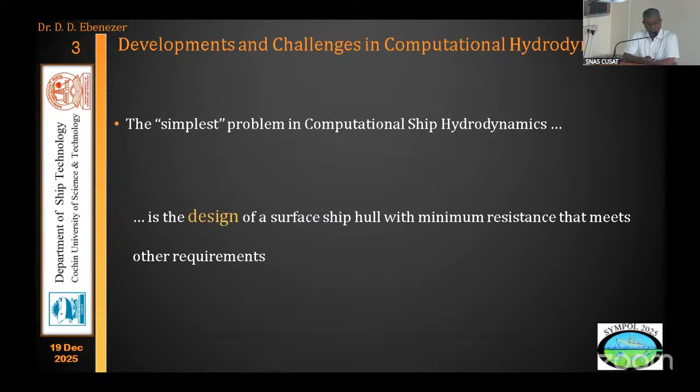So the key word here is design, which we often use very liberally in the industry, saying that we have designed something. How would I define saying that I have designed something? A design is the solution to a constraint optimization problem.

We build houses, we design houses, but they may not in any way be the solution. They may not be optimum in any sense. But if you do try to find the optimum solution, then that's a very difficult task. And that is actually what we are going to talk about today.

So what is involved in this particular design problem? I need to use computational fluid dynamics. You can think about experimental fluid dynamics in the same breath, to optimize the underwater hull form and minimize the resistance. It's not just that, there are several constraints.

Perhaps one very important constraint is the amount of time available for solving this problem. I mentioned CFD and EFD. If you give only 1 month and maybe $100,000 to both the CFD people and EFD people and ask them to come up with the best hull, the CFD people will do a much better job because there are many more options that we can try and we can choose the best among many variables, variants.

Okay, there are many other constraints. For example, the hull should be fair, and the displacement or underwater volume is more or less fixed with some small amount of tolerance. And I need to do other basic things which every naval architect does.

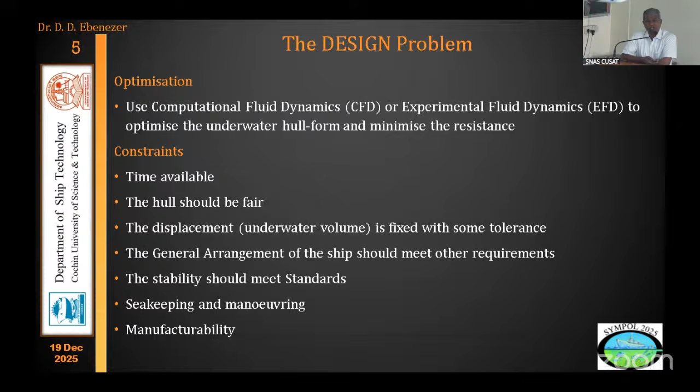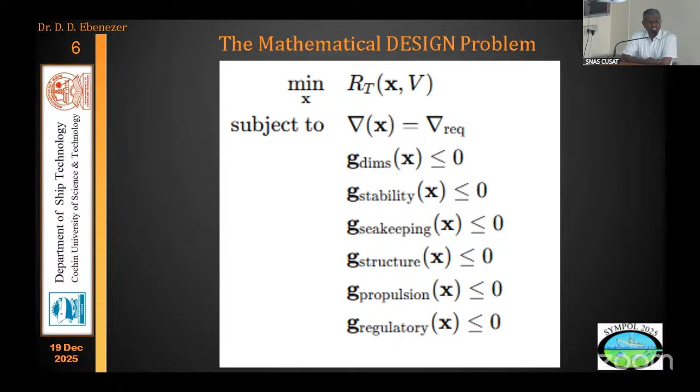But even without worrying too much about the constraints, the problem that we have to solve is a very difficult one. There are mathematical ways of stating this problem, but very often it is not done in a strict mathematical sense. So the way it is done is that we start with a parent hull and we create a finite number of variants.

We don't have an infinite number of variants, we don't find any derivatives. We create a finite number of variants using mathematical tools and our sense of naval architecture about what is likely to be best, and you evaluate the variants - for each of those variants, you find out what will be the resistance, and then you pick the variant with the minimum resistance.

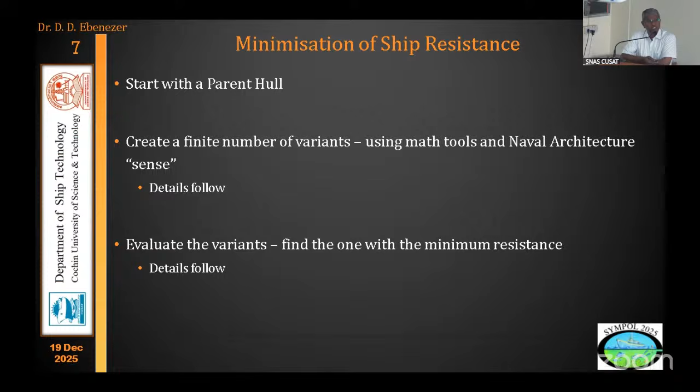Even stated like this, which is a slightly watered down way, this is quite a hard problem to solve. So we have to choose the best among many competing candidate hulls. And what is the difficulty? It is not easy to find the resistance of even one candidate hull.

A lot of effort is required to do that. And if you do it correctly, if you do it with much effort, it will take time. And the second part is that all the variants will have almost similar resistances. So the resistances of the candidate hulls differ only by a few percent.

So in order to think about this problem in a somewhat simple way, you can think that you have a geometry scale with only centimeter markings. There are no millimeter markings. And you have some object which is, say, approximately 6 centimeters long. And you're asked to find out which object is the shortest or best. You will find that you cannot use your geometry scale to find out which is shortest, because you do not have enough resolution, you do not have enough least count in order to determine which is the shortest.

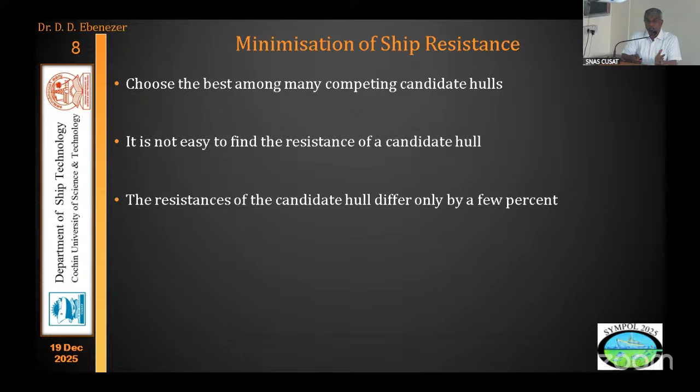So the similar problem is there when we come to do minimization of resistance. But it's not just that. Every candidate hull that I need to look at has to be fair.

And all naval architects are taught that your lines should be fair. And whether or not your lines are fair, your professor will say, hey, this is not good and that is not good, and tell you to straighten some things out. But in a mathematical sense, it is not easy to describe what is fair. This is written in a book regarding the geometry of ships, that fairness is very subjective, that you cannot mathematically decide what is fair.

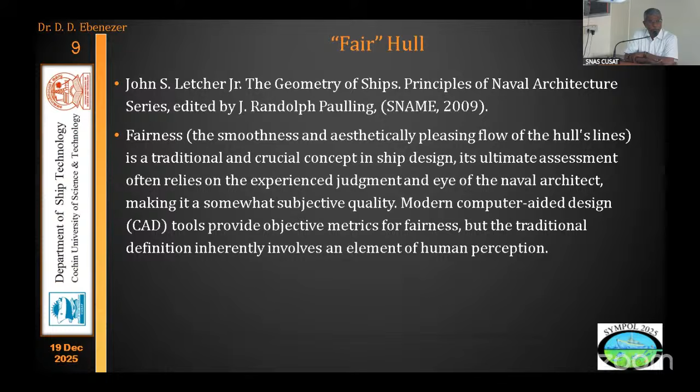Now, naval architects have built some tools, and here we can see what is known as the KRISO container ship hull, and we are looking at it.

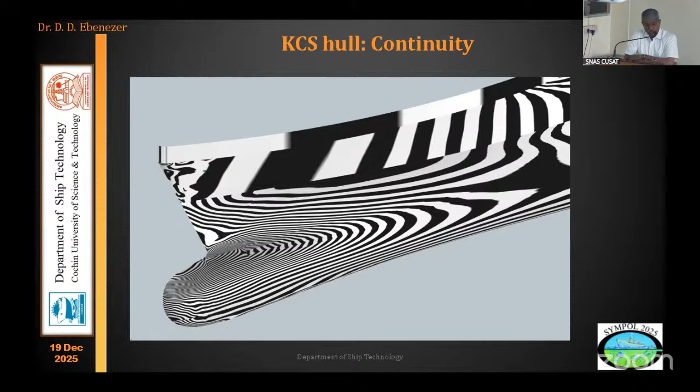We're looking at the C2 continuity, the second derivative on the surface of the hull, to see whether it's continuous. It's not bad, all my thick lines are somehow connected to each other. But if you want to create variants of a hull, you have to ensure that your lines are also continuous. That's not very straightforward.

Now, when we say we have a method to find the optimum hull, we need to develop what is known as a robust method. This robust method should be, if it is really robust, such that a novice should be able to implement it. Somebody who is not an expert in finding the resistance of ships should be able to do it. You may be very good at some particular task, but if you try to teach somebody else and train them to do it, you find it difficult, because that person doesn't have much background in whatever you're doing. So if you can develop a robust method that a novice can implement, then you have done very well.

For that, you may have to write down certain rules and illustrate it in many different cases. It's interesting that all software developers give you tutorials, and you find that people who start using this software find that the tutorials are not very useful for ships that are of interest to them. These tutorials run well for the tutorial, but they don't run well for the other case. That means whatever they are telling you to do is not a robust way of doing it, and that is what we need to develop.

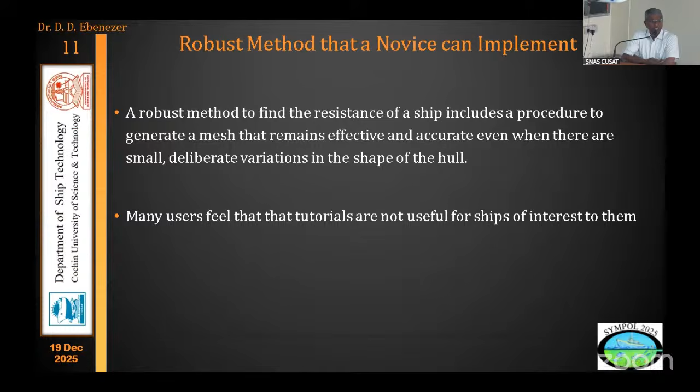This idea is very important. Many of us in college think we calculate something, and that we find the answer to something. But in computational fluid dynamics, and even in all experiments that we do, we only estimate what the answers are. We cannot find out the truth. If I ask you to find the length of a pencil, you estimate what the length is. You cannot give me a number, you cannot tell me an answer to it.

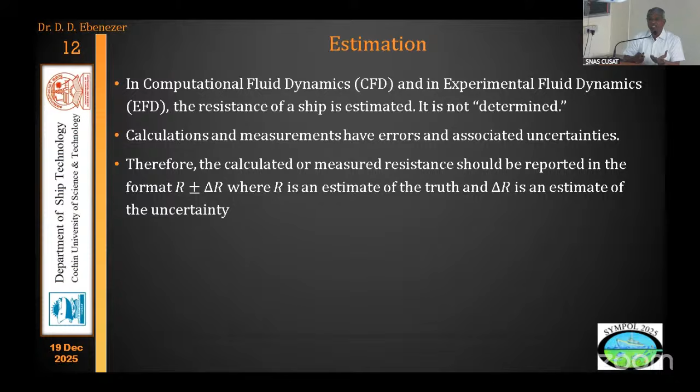So whenever I estimate the resistance of many candidate hulls, there are error bars associated with each of them, and I'm trying to compare which one is best, and therefore that's a difficult task.

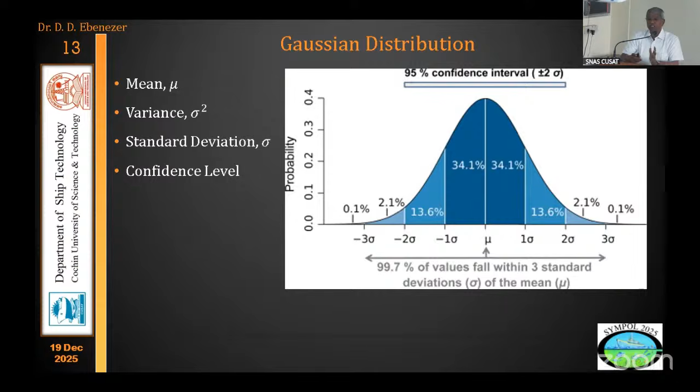All college students will be familiar with this: a Gaussian distribution, where I make several measurements of the same object and come up with several different answers. If I plot all of them, they will lie on some Gaussian distribution curve. Similarly, if you find the resistance of a ship using computational fluid dynamics with many different meshes, you will come up with different answers, and each answer, if you plot, will look like a Gaussian distribution. From that, you can find out a mean value.

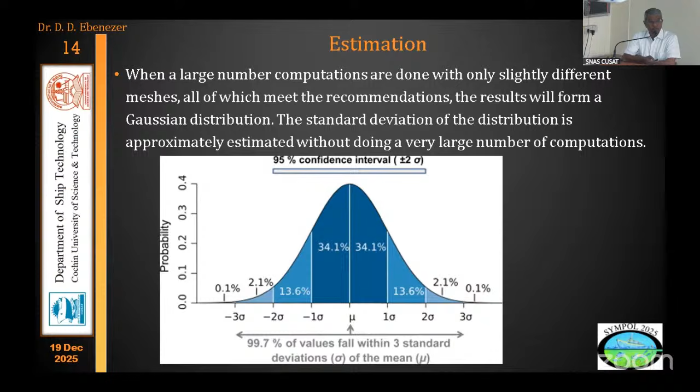There are some other techniques where we want the mesh density to go to infinity, or the mesh size to go to zero. But finally, you will end up with an estimate. Nowadays, every measurement or calculation you do has to come with an error bar. If you do not give me an error bar, I do not consider the number you are giving me as a result. Therefore, obtaining these error bars is also very difficult in computational fluid dynamics, so we learn how to estimate and how to keep the error bar small.

So one of the problems is that we have to create variants. I have a parent hull that already has something good, maybe in operation, but I want to create variants to see whether I can make one that is better. There are some approaches, some standard methods described in naval architecture books.

One of them is known as the Lackenby method, and you will find that the implementation of the Lackenby method is different in different software. Therefore, you will attempt to do the same thing using different software and come up with slightly different hulls. Usually, what is done here is that we say, for example, I want to move the longitudinal center of buoyancy forward or backward in an effort to change the shape of the ship. If I move the LCB forward, the hull will become fuller in the forward region.

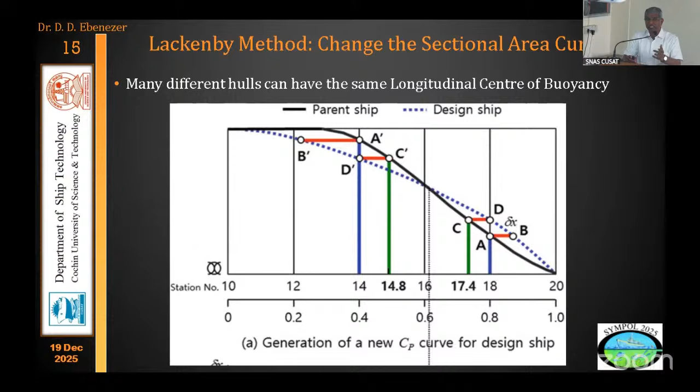So I say, I want the LCB to move forward by 1%, and different software will give me, starting from the same parent hull, different hulls. All of them will have the same LCB moved 1% forward. Therefore, I don't have one handle, one parameter to describe my variant, which becomes difficult when you want to compare many variants.

So you keep making your mesh finer and finer. You hopefully get answers which lie on a curve, and then you can extrapolate your answer and find out what will happen when the mesh size is zero. This method is so important that there's even a book written just on Richardson extrapolation.

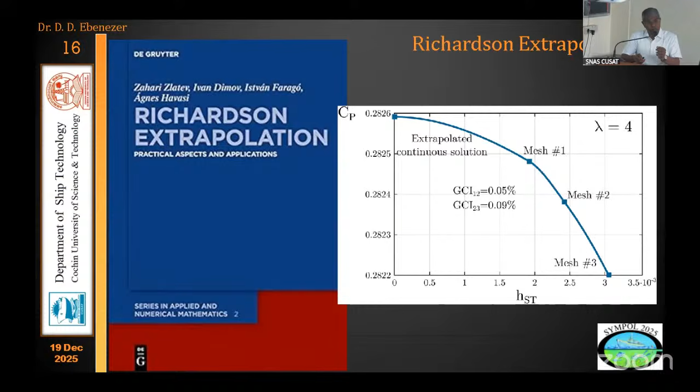But there are challenges if you try to use it, because it's not easy to hold certain things constant while you're changing others. I'll not go into the details. This Richardson extrapolation is a lot harder to actually implement in a nice way than what first appears at first sight. This is a very interesting figure.

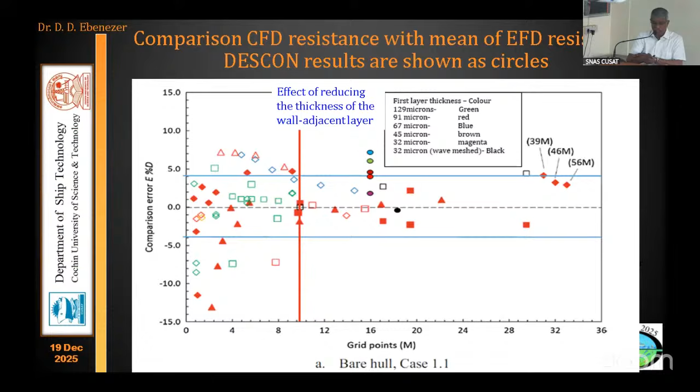One of the things we have to do in computational fluid dynamics—the first point I mentioned is time, the time available to solve a problem—is to choose a turbulence model. If you look at industry today, most people prefer to use what is known as a K epsilon model, because it requires fewer cells and therefore will run faster on whatever computing facilities you have available.

But the K epsilon model has got inherent limitations, because it does not model the viscous sublayer very well. There's a very fine layer in any turbulent flow close to the ship hull, and that part is modeled in the sense that we assume what is happening there. We know that assumption is wrong, especially when using the K epsilon model near the aft of the ship, but time prevents me from using a better model.

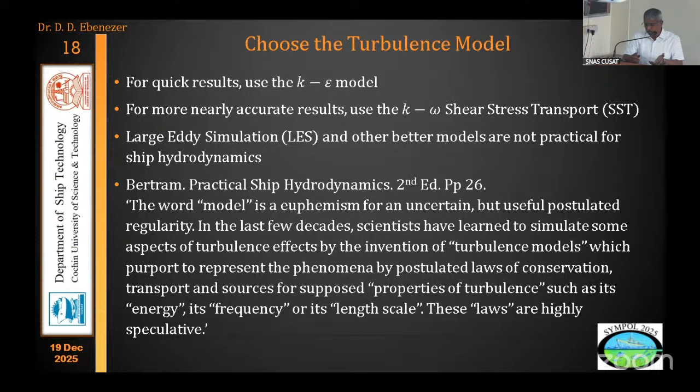So this is kind of a low-end computational fluid dynamics model, but it's very popular in industry because that's all the time we have for running it. Some limitations of the model are mentioned in books, but I will not go into that.

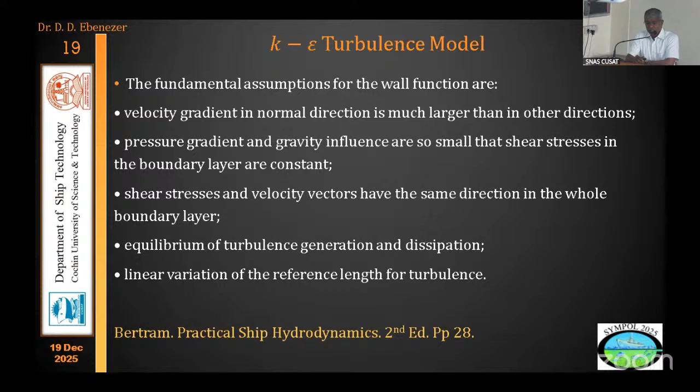When we try to solve this problem, we need to develop good methods—methods that are robust, which a novice can use, but at the same time ensure rapid convergence to the correct resistance. Otherwise your iteration will keep running, maybe for days or nearly a week, but you will not get convergence to the correct answer.

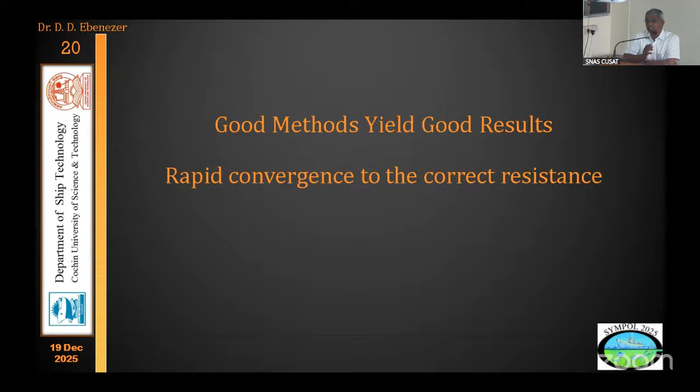We have a problem to solve, maybe a 100 million by 100 million matrix solved by iteration, and here is the result for one particular case. You can see that with a lot of effort we developed a very good mesh, and therefore the convergence is very good. People seldom show you how the results converged, even in journals, because it's not good.

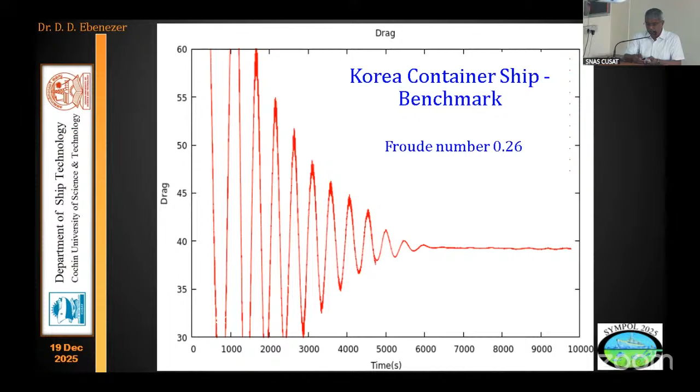And whatever is not good, they hide, and they tell you what they want you to see. But we've developed some robust methods, so we are able to do this very well.

So to conclude, it is quite difficult to solve even the simplest problem in computational ship hydrodynamics. That is optimization of ship resistance. You want to find the resistance of a given hull. I'm not considering that as a problem, because optimization is the problem. To find the resistance of one ship, yeah, we can do that. But to find the best one, that's lots more difficult.

Numerical methods will usually give a result. So many people buy expensive software, or they use open source software - garbage in, garbage out. They will get an answer, and they will tell you that's what I got. Usually there is no way of checking whether what they have done is right. Nobody knows the truth. You don't have experimental results, you don't have CFD results, whatever.

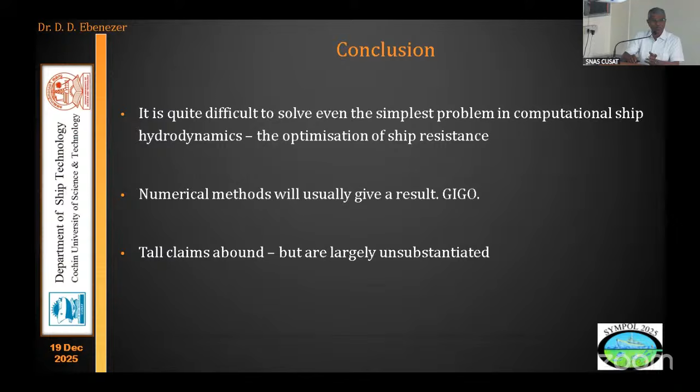Because of that, in industry and generally in the computational fluid dynamics world, tall claims abound. People say that I've done this and that, even in journal papers, but they are largely unsubstantiated, which means there's no proof for what they say. They claim a lot of things, but there's no proof. So yeah, those are just my ideas, and thank you very much for your patience.

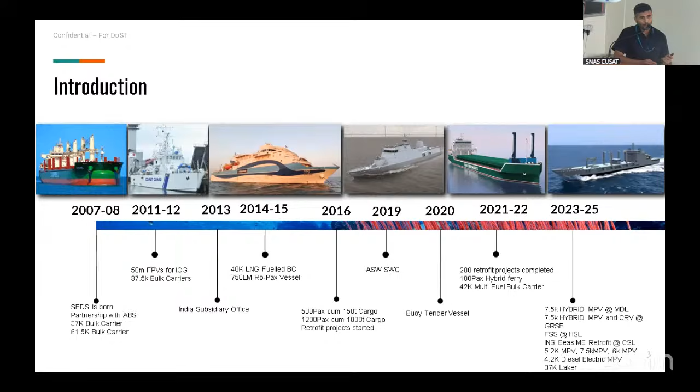I just wanted to say which are the areas that we work on in terms of simulations. Fluid dynamics is obviously one, solid mechanics, acoustics, and electromagnetics. What connects all these is the method, the numerical approach I earlier mentioned. Most fluid dynamics problems you can handle with RANS. Solid mechanics with stiffness equations. Acoustics mainly uses Helmholtz equations, and electromagnetics uses Maxwell's equations. So what you're trying to do is reach an integral or a differential form so that you can computationally solve it.

But each of these domains has its own challenges. This platform today is for fluid dynamics, so I will not go into the details of the others, but each of them has its own set of different challenges.

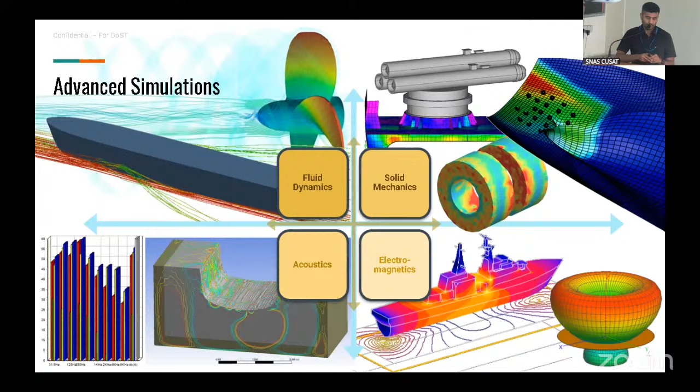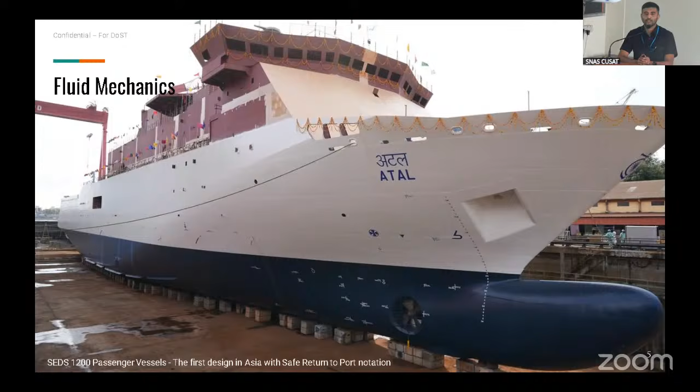Okay, now coming to the hydrodynamics.

When we look at the problems that the industry wants to resolve, various things that a ship design industry or a shipbuilding industry wants to know about ships. Obviously the resistance, how you can optimize the hull form to achieve minimum resistance, the propulsion, how selection of a propeller, how can you have the best efficient propeller behind the hull to get the best powering performance.

How, for example, many of the vessels that we do, research vessels, have very stringent seakeeping targets. Your vessel motions, because one is for the crew, since the crew is engaged in very critical laboratory measurements, and it should be comfortable for them. Second is for the instruments, they're very sensitive to vessel motions, and also, for example, slamming. So there are a lot of conditions attached to these projects when it comes to seakeeping.

Another big problem is the maneuvering of the vessel, because there are cases where, I will touch upon it briefly, maneuvering is one problem even today. We work with almost all the major model tank basins in the world: Marin, HSVA, KRISO, David Taylor. And maneuvering is one problem we have found even the best in the industry are struggling to replicate, not just numerically, but also experimentally.

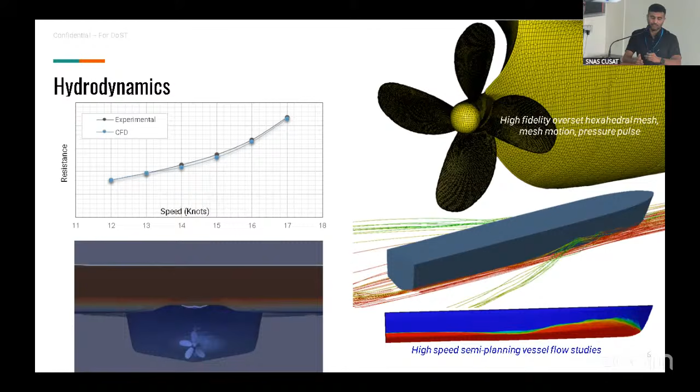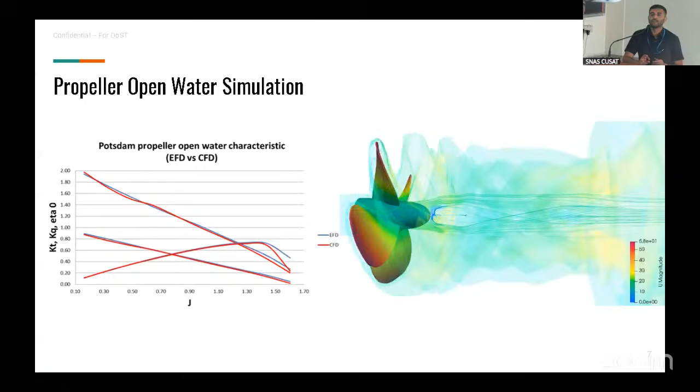This is a validation that we did for the Potsdam propeller, the open water characteristics. I'll just show this. I put some videos so that people sleeping here can wake up and probably take a glimpse.

Okay, now we talked about these three methods: analytical, numerical, and experimental. Of late, in the last 4 or 5 years, we are also seeing a new approach where, instead of a complex solution where brute computing force is employed to solve the Navier-Stokes equations, you can have a reduced order model by parameterizing the inputs and then matching the output. So you basically run multiple cases, hundreds of cases, making small tweaks, and allow a reduced order model or a surrogate model to be made. And basically what happens is you are trying to find a match between the various parameters used as inputs and outputs, and then use a machine learning algorithm to have a regression analysis of that.

And then finally it should be able to predict, and it learns through this process. So this is an approach which is getting traction in every field, not just in hydrodynamics or general CFD or fluid mechanics, but in any area. This is the trend you see as we have more and more computing capacity, where you can run hundreds and thousands of these simulations.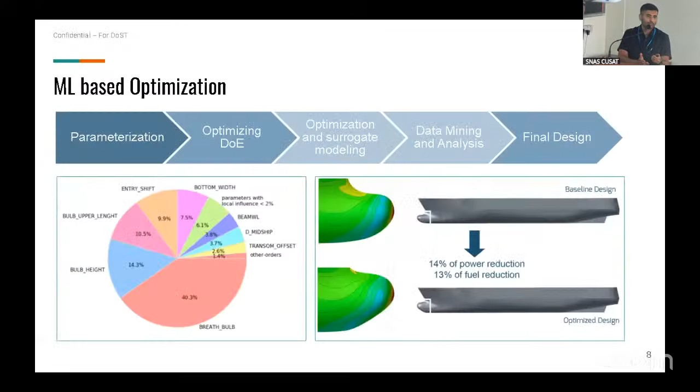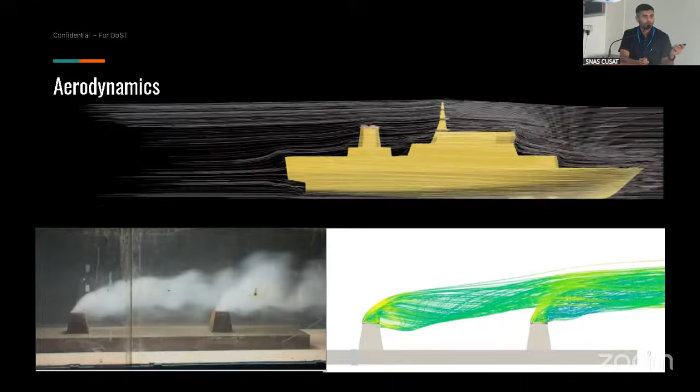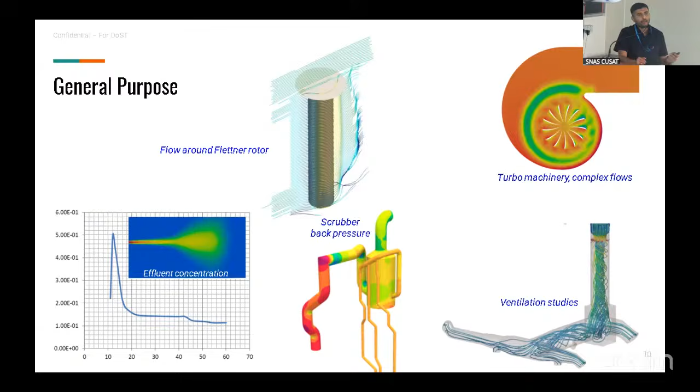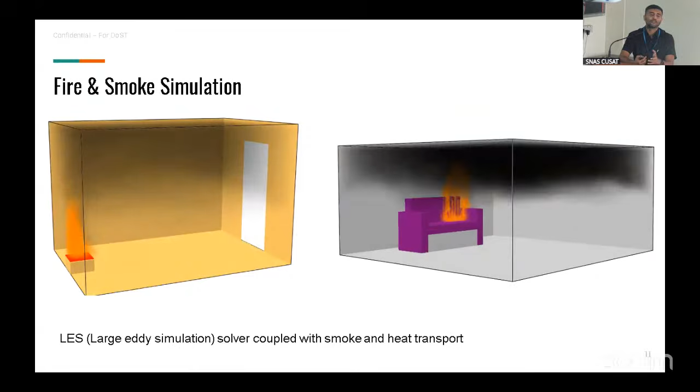This was for one of the tunnels being constructed in India, the Mumbai-Pune new expressway, which comes below the Lonavala Lake, about 10 kilometers long. The challenge was to simulate a tanker fire, 200 megawatts of heat coming into the tunnel, and whether the high pressure water mist system can attack it and control it.

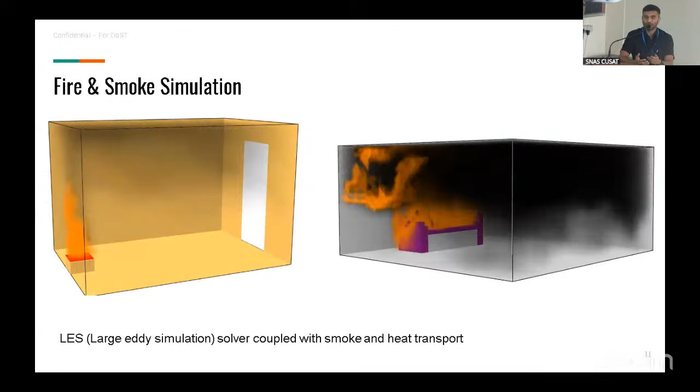So during that exercise we tried various options like this. This is just a simulation that we tried out and attempted to validate.

I think some works I just wanted to show you what we are doing in the industry. Pleasure to meet you, and we can have some of those questions - I can direct some of them to him. Okay, thank you.

Thank you, Vivek. Very interesting to see that a lot of CFD work is being done at SEDS, and I'm heading a technical team at SEDS. I'm sure it was a very challenging job for Vivek. As I said, we'll have discussions towards the end for whatever questions. Now I'd like to move to Mr. Lijo T. Joseph - a hydrodynamic engineer with over 10 years of experience in CFD. He's actually a mechanical engineer, but he did his master's in ocean engineering from IIT Madras with Professor Anantha Subramanian, and we were colleagues for some time. Now he's working as a hydrodynamic engineer at Aries Marine. I know he's fully involved in CFD, leading a few experts in CFD. He must be one person doing only CFD, isn't it - like naval architects, we do many things, like Surya, you're doing stability today and tomorrow. But I welcome you to the podium to share your ideas.

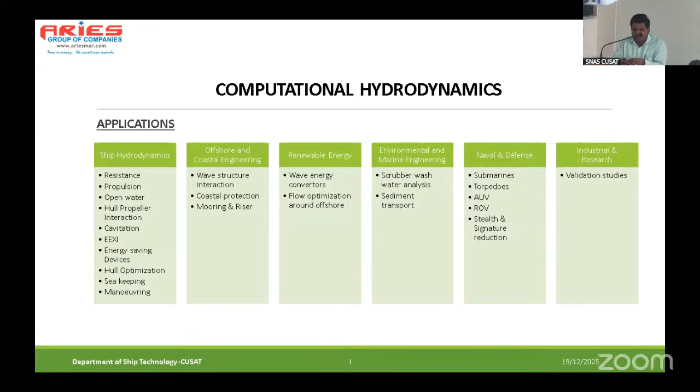So basically, these are the works we are doing in the field of computational hydrodynamics. The first one is power prediction of the vessel, which includes ship resistance prediction and self-propulsion parameters prediction, like wake fraction and thrust reduction. The last one is the open water characteristics estimation for open water efficiency. All these factors lead to the power prediction of the ships. So that is the first one we are doing as a part of CFD.

The second one is EEXI study, basically the Energy Efficiency Existing Ship Index. IMO has put forward some regulations regarding the emission of greenhouse gases, to bring down the emission of these gases. So we are checking that the existing ship has compliance with these IMO regulations. That's what EEXI study means.

Coming to the second point, that's scrubber wash water study. Like mentioned in the earlier slides, the scrubber means exhaust gas cleaning system. IMO has regulations stating that the wash water coming out from the scrubber has to get diluted as per the IMO regulations range. So we are checking the same with this scrubber wash water study.

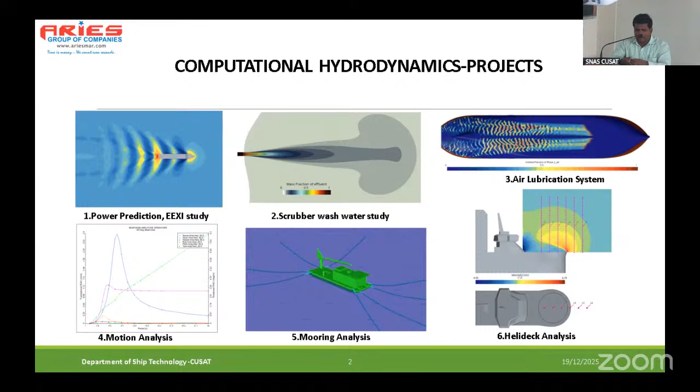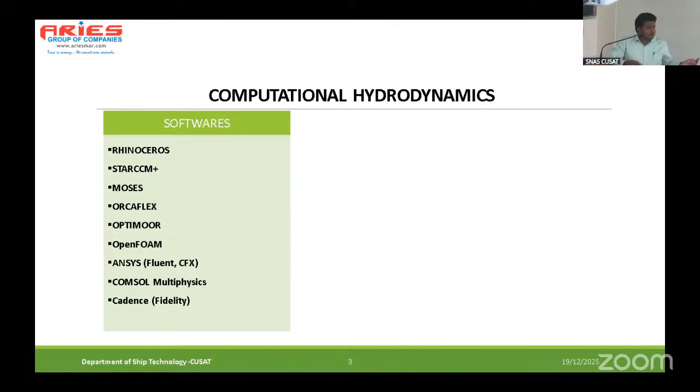When we talk about the challenges in computational hydrodynamics, the first point is computational time. This means if our problem is bigger or more complex, we need to analyze more area of interest, which means our domain of analysis will be more. In that case, our computational resource requirement will be more. So that is one of the challenges.

If the problem is too complex, our computational resource requirements will be much more, which increases our computational cost. Otherwise, if you have the existing computational system, the analysis time requirement will be much more. These are the main two challenges. For bigger industries, it's feasible to have a high performance computing system, but for smaller industries or research firms, accommodating this high performance computing system is much more difficult. So that is one part of the challenges in terms of computational time and cost.

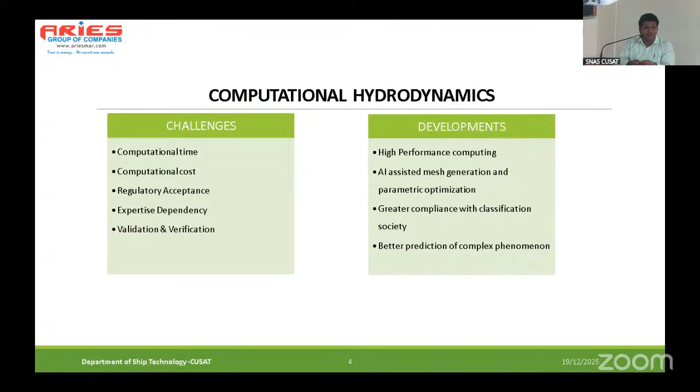The fifth one is, as I said earlier, better prediction of complex phenomena. If we have good high performance resources, we can go ahead with complex problems and get better results. Actually, all these challenges and developments are always interrelated. So that's it from my part. Thank you.

Thank you, Lijo, for summarizing the work you have done. I know you have purposefully omitted the technical part, but you have brought out the challenges and opportunities well.

Thank you. Okay, next speaker is Mr. G.A. Surya Teja. He is very familiar to the audience here, as he routinely briefs our project with Cochin Shipyard with Dr. Manoj, Dr. Abhinay sir, and all the research scholars. For the benefit of the audience, I would like to introduce Mr. Surya. He is currently working as Deputy Manager in Cochin Shipyard Limited in the basic design department. He holds a BTech in Naval Architecture and Marine Engineering from Andhra University College of Engineering, Visakhapatnam, and an MTech in Ocean Engineering and Naval Architecture from IIT Kharagpur. He has over 4 years of experience in ship design and has done a lot of work in Cochin Shipyard in the area of CFD. So we look forward to hearing from you.

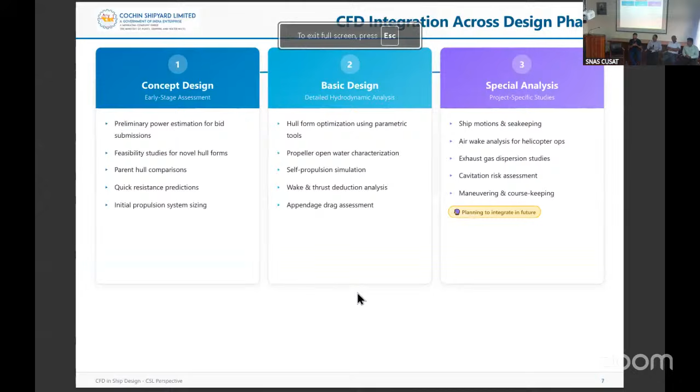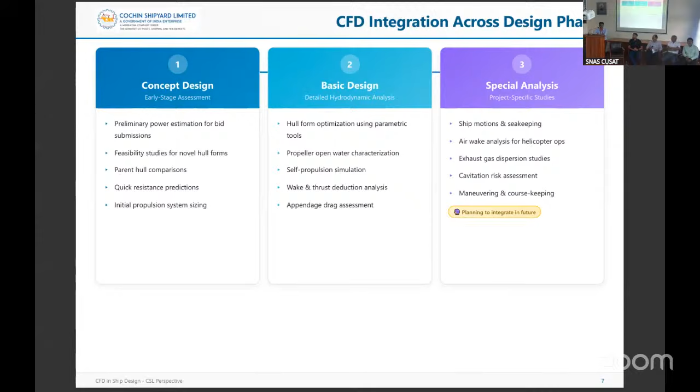So basically, I want to put across a basic design perspective. I'm coming from the basic design section from the shipyard. So I want to share our perspective and our journey in CFD throughout these years, how we are doing in CFD, and what are the challenges and emerging trends in CFD.

Before going to that, I would like to highlight, as my professor used to say, naval architects are basically jack of all trades but master of none. You do canting calculations, powering, stability, everything.

But when it comes to advanced studies like FEA and CFD, traditionally in India it used to be outsourced. I think FEA has moved ahead already, and we are also slowly trying to catch up in FEA. But somehow CFD took a backstage. That's what we want to bring into picture and move ahead in the CFD area also.

So the journey of CFD started with our alumni. His name is Vishnu Ara, relieved in 2016. He happened to go to IIT Kharagpur to attend a seminar on OpenFOAM. He did a 3-day seminar and came back and introduced CFD to CSL, to basic design. Then it picked up from there.

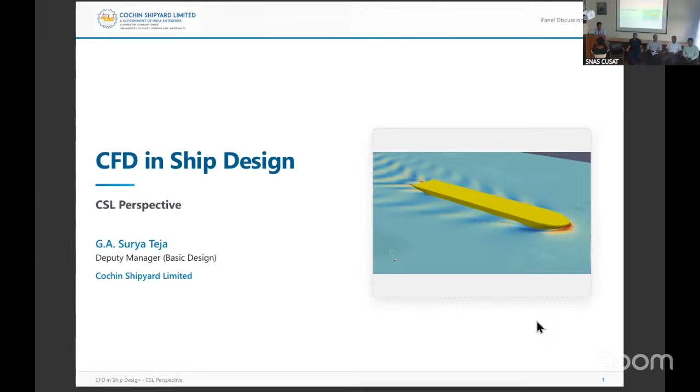Then I just want to present how we moved from there so far, what are the challenges and all. As our previous panelists covered, if you see the simulations in shipbuilding, we would like to categorize them as standard, complex, and unique simulations.

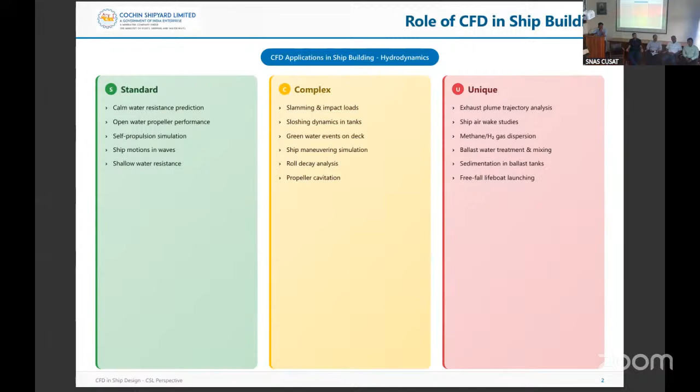Standard means, for traditional ship design, you need at least this set of simulations to go ahead with the design. Basically it involves model testing, or you do a CFD resistance speed power curve, and ultimately get the speed power curve. If it happens to be a shallow water vessel, you need to do a shallow water resistance simulation. This is traditional for every project, required to build confidence in your model testing.

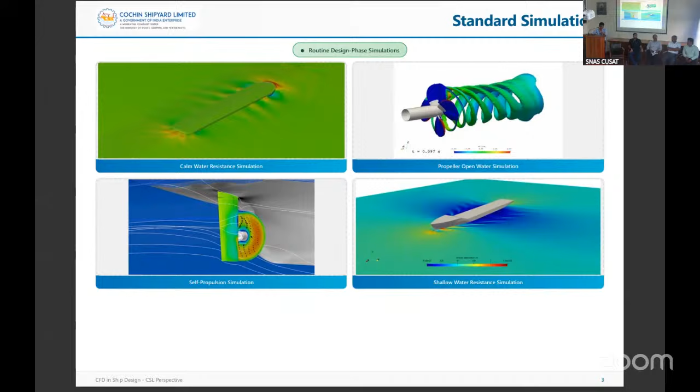If there is model testing, you can validate. But if there is no model testing, it's better to have these things, because nowadays we are seeing vessels where regression methods also fall short - the vessel dimensions are such that you cannot apply those regression methods for these new types of vessels.

Then there are complex simulations like roll decay, sloshing simulations, propeller cavitation, slamming loads. This requires high computation capacity, highly nonlinear problems, and is often required only for very sophisticated vessels. We often don't do that as a shipyard.

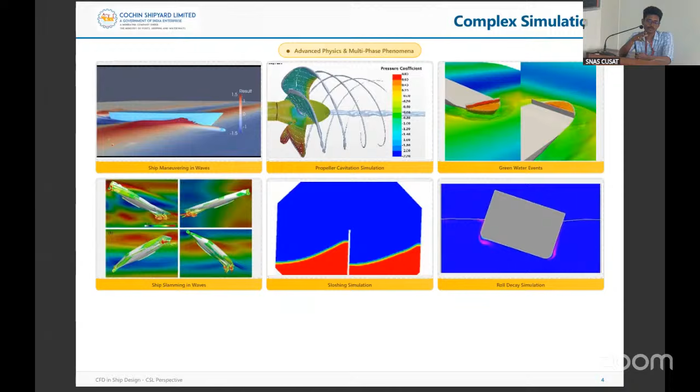This complex part, like propeller cavitation and all, will mostly be designed from the OEM side. But if you want to do it from your own perspective, there are so many test cases available for validation, but these are mostly not done in house.

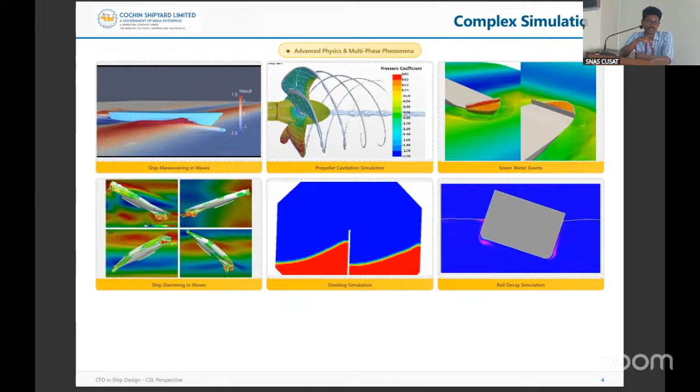And as our previous panelists have presented, there is free fall lifeboat simulation, exhaust plume simulation. Nowadays alternate fuels are also coming into picture, so you have dispersion studies - recently we did a fuel cell catamaran vessel where dispersion of hydrogen needed to be studied. These are some use cases - I might have missed some, like energy saving devices and new air lubrication simulations. But mostly these are the typical applications of CFD in shipbuilding.

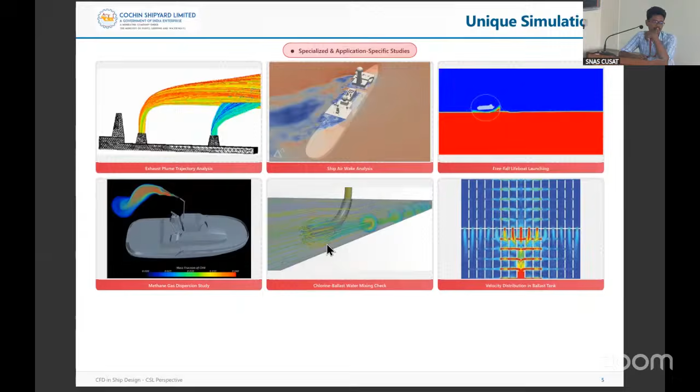Coming to the challenges, CFD is highly intensive - it needs high computational resources, and there is skill required. Unlike other disciplines like stability and all, you need to know what you are inputting in CFD and understand the results. You need verification, and there is validation and uncertainty. For CSL, we have model tested data and sea trial data, so in that aspect we have a wealth of data.

Then, of course, the software license costs. Each of the commercial software costs a lot of money, and maintaining it is also a lot of charges, a lot of cost. So these are the main challenges.

So in our case, how we are using CFD, basically whatever concept designs we are doing, we use CFD based power prediction along with regression methods if applicable, and on top of that we conduct CFD also. Then in the basic design phase also, we are using CFD together with hull form parameterization.

We recently acquired software called CAESES. We were trying to optimize the hulls and test them in CFD.

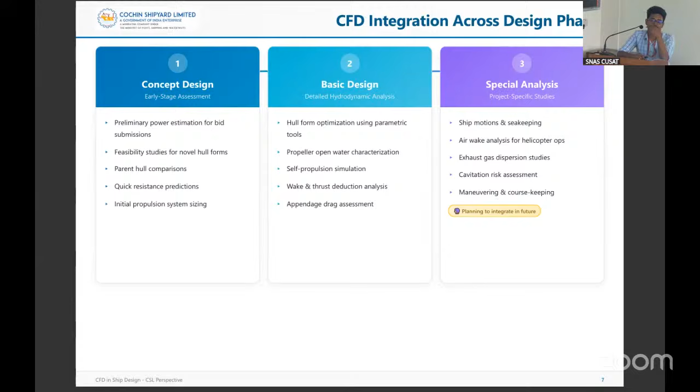Then for some projects, we also conducted simulation to get wake fraction and thrust deduction, which I'll be showing. The special analysis part, we have not yet moved there, but soon we are planning to increase our hardware capacity and slowly venture into that special analysis part also. Now we are only doing this concept and basic design part.

So some of the projects which we have done, I just want to highlight. Based on the shallow water vessel we were doing, there is no model test basically, but we have a task of designing the propeller. So without that, this hull form is tricky.

It is having the stern tunnels to accommodate large propeller diameter. So we don't have any model test data, so we need to get the wake fraction and thrust deduction. No regression method is available for giving W and T, wake fraction and thrust deduction, for propeller design. So we use CFD to get that wake and thrust deduction.

And one of the second example is in one of the naval vessels, we found out that maneuvering course keeping stability is not so good. So we need to have this ventral fin design to improve the course keeping. Then we studied the resistance effect on it, and we aligned the ventral fin.

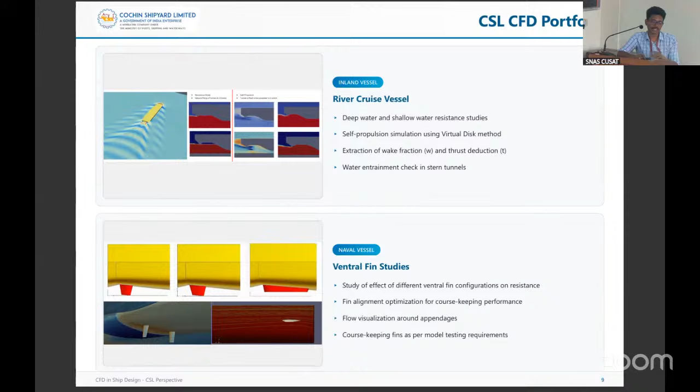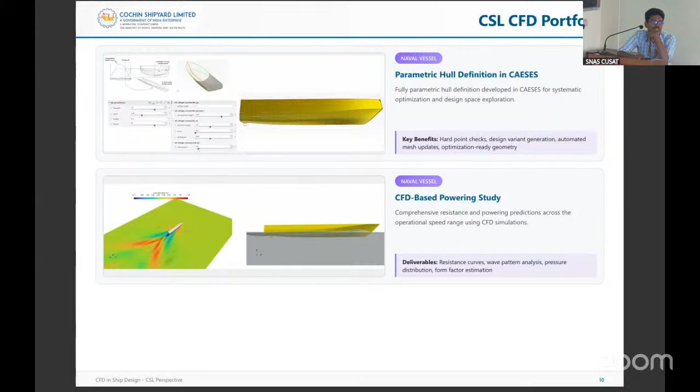Then for one of the naval vessels we optimized, we created a fully parametric definition, and we did a CFD based powering study.

And these are some other simulations which we have done. One is this AUV launch simulation. This was required for one project where you have to see it being launched in a containerized form on the transom of the vessel, like a free fall boat basically. So we wanted to study the path taken by the AUV, but now that concept has changed to davits. It was only a preliminary study.

Then we also did other studies including some concept designs we worked out. We were using CFD to see, you can see the bottom picture, there is a tunnel given to accommodate large propeller diameter. So we are using CFD to check at what speed the tunnel is getting entrained with water. If it is not the case, then we have a problem in propulsion.

So this is how we are using CFD in our use cases.

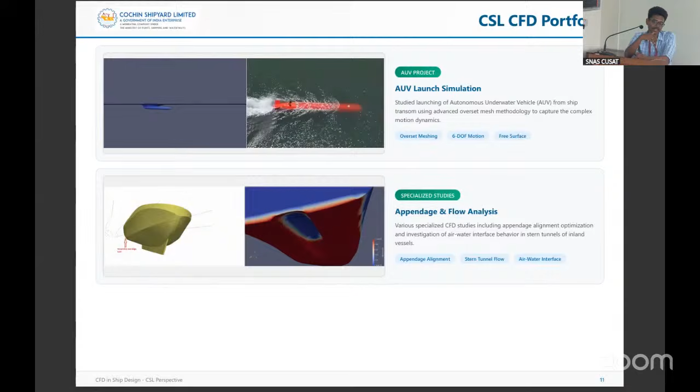Then parallelly, we are also working to enhance our capability. Like Satish sir said, we don't have a dedicated CFD team per se, but as previous panelists conveyed, you need to do verification and validation when doing CFD. There is a lot of data available, like KRISO, KCS, KVLCC, DTMB, across the range of Reynolds numbers. You have open source, open domain models where resistance data is available. We try to verify and validate.

Then we also happen to participate in the blind workshop. I think there is this institute called JoRes, Joint Research Institute. It is formed by a group of companies, including some renowned testing tanks and various ship design outfits. What they're trying to do is they found some vessels, namely tanker, cruise vessel, and some tugs. During dry dock, they tried to 3D scan the hull, applied paint, measured the roughness, and did a proper feature capture. The idea is to validate the efficiency of the CFD code at least up to the self-propulsion simulation. We happened to participate in one of those cases, which is a resistance workshop only.

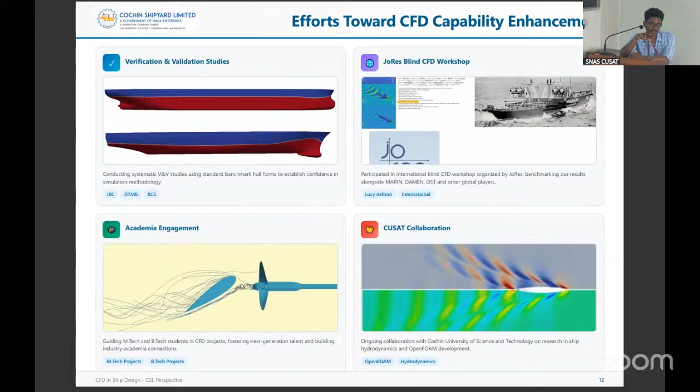So those problems when we are facing, we are trying to collaborate with academia and trying to understand the scope and length of the problem. So these are the efforts we are doing in CSL.

So far we have been using this open source tool, OpenFOAM only. I would also highlight the problems we are facing with OpenFOAM.

The advantages are obvious: free, full transparency, you can extend the code for research. It has very good scalability because everything is available. You can include your own libraries, your own set of code if you are a good programmer.

But the downside is since you mostly are coming from user side, you mostly apply the thing. One problem is meshing. You need to have proper boundary layer meshing, and we often fail with the traditional mesher that comes with OpenFOAM.

For ship resistance simulation, there is this Courant number dependency. The solvers still depend on a semi-implicit formulation, so you cannot take much bigger time steps. Basically, ship resistance or ship self-propulsion is a steady state problem, and we want to march the solution towards the final steady state. That way, in OpenFOAM we feel we are lacking, we are not able to march the solution like other commercial software.

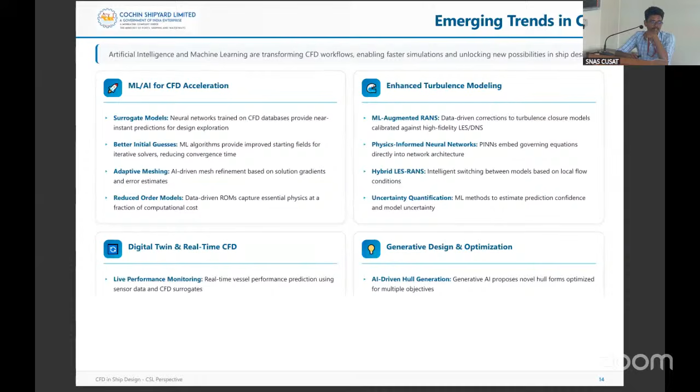I think this is emerging, this is the new thing that we are seeing in CFD. I think this ML and AI topic was already covered in the previous one.

What they are trying to do is create a parametric variation with a number of variants, and do design of experiment. Let's say you have simulation parameters with multiple combinations. First you do design of experiment, meaning you are not minimizing any function, you are evaluating everything, running simulations for all combinations of parameters and storing data. Using that, you go to the next level, the optimization phase, so that you don't get stuck in a local minimum or local maximum. By doing this, you will be able to evaluate more variants in the design space.

Then there's enhanced turbulence modeling. Recently, people are looking at using AI to accelerate CFD convergence. Ultimately, CFD or any numerical method is a numerical approximation, we are discretizing the partial differential equations into algebraic form, then assembling and solving them in an iterative way. There also AI is being used to accelerate the iteration phase.

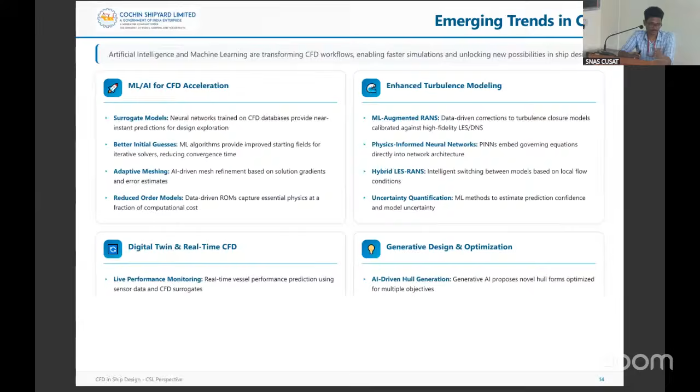So this is what we see as the way forward. I think CFD is no longer an optional thing in design houses, because to give an optimum design, it's not just finding speed and power, it also requires giving an optimum design to owners.

We need to be competitive with design houses abroad, so I think we need to have all these skills. We need to be able to give optimized designs, for which you need skills in hull optimization, skills in CFD, and confidence in CFD results. I think these are the ways in which you can build the people and get that environment.

One way is through industry-academia collaboration, which is very much needed. I think at CSL we have a lot of use cases which we try to give to MTech students, like the rudder problem I mentioned. Every time we have practical use cases which we can use to grow our own talent.

Then I think there is a new ministry initiative, this Indian Ship Technology Center that is being proposed. I think with that we also feel it will solve some of our R&D problems with respect to highly specialized studies. So with that, I would like to conclude. Thank you.